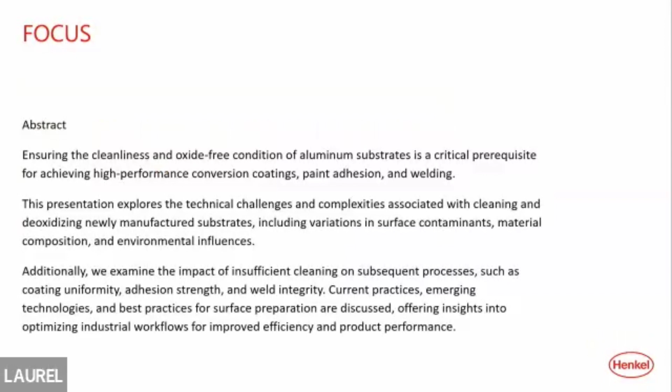This is my abstract. I wasn't sure how long I would be speaking today. This could be a dissertation. I will not cover all of this since I've got about 20 minutes, but this was what I was interested in when we were originally investigating it. And this is kind of what I'm getting into right now. I'll jump forward because you're going to get these slides in about a week anyways.

I am working a lot with aluminum castings and new aluminum alloys. And what I am seeing from my customers is that, of course, we're seeing a tremendous amount of use of aluminum in the industry. Lightweighting, we've heard of it. Sure, there was a big push with it for EV. Of course, that's kind of taking a little bit of a backseat, but hybrid is getting more of a push, which still has batteries in it.

Still ICE, we want to get as much mileage out of our vehicles as possible, which lends towards using aluminum. So we can displace some of that weight, get better mileage. And also, regardless, we all have sustainability goals, and aluminum is practically 100% recyclable. So it works well for everyone. Anytime we add alloys, it's going to make surface treatment a little bit more challenging for my side.

I'm working with OEMs and aluminum manufacturers, and they are sending me aluminum samples to work with. These are typically under NDAs. I don't necessarily know what I'm working with, and they're still expecting to get certain performance. Great. I love playing around with it, seeing what I can do in the lab. And it's interesting to see how these perform, how they take on a coating.

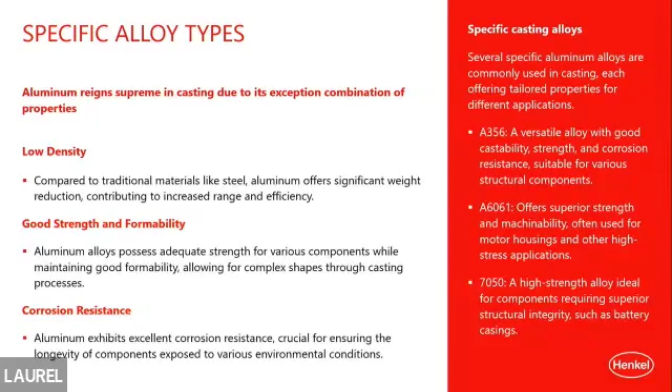Granted, this is a huge upfront cost, but this is going to move our manufacturing speed forward. It's going to reduce complexity, man hours. Granted, we saw orders of these gigacastings that were coming in, that were being installed throughout North America. I haven't been following it for the last few weeks, but my understanding is they're still being installed, they're still coming in, and they are causing a particular challenge for me.

With these gigacastings, they tend to be stickier metals. And these stickier metals can be more challenging to remove from the mold, so you need to use a stronger mold release agent to get it out of the mold. So now I have to remove that mold release agent. And I don't necessarily know what that mold release agent is. And I don't necessarily know what that alloy is anymore. So what I'm finding is I really need a good etch and cleaner.

Aluminum is amphoteric. So it'll dissolve at higher pHs and at lower pHs. So the nice thing about that is that I can get etch at higher pHs or at lower pHs. So at the beginning of our process, I'm finding I can't get away with a low pH cleaner. I need to etch those parts. But anybody that's played around with aluminum at all knows you can't smut it either. So we're running kind of a fine line there.

And thankfully we have labs, our customers send us parts and we run them and we dial it in and we figure out how well it's going to run and we kind of tune it up before we actually run it on their line. Now, of course, the alloy probably is going to change a little bit before we actually run it on their line. So then we show up on the line and we tune it up all over again. And that just keeps things interesting, right?

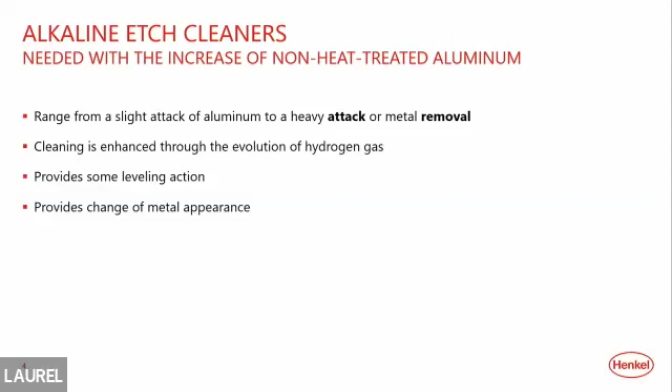So you've wasted time. It looks bad, and it could be a safety issue. So we have to remove that aluminum oxide layer. So we have to deoxidize it in some manner, either with an etch passivation, which is a process we have, or with an independent acid deoxidizer.

And look at my timing. Like I said, I do not want to get in the way of the bar. I'm being careful.

So acid deoxidizers work very well because they can also neutralize any residual alkalinity that's coming in from the system as well. They remove that oxide layer, and they can give you a nice uniform surface.

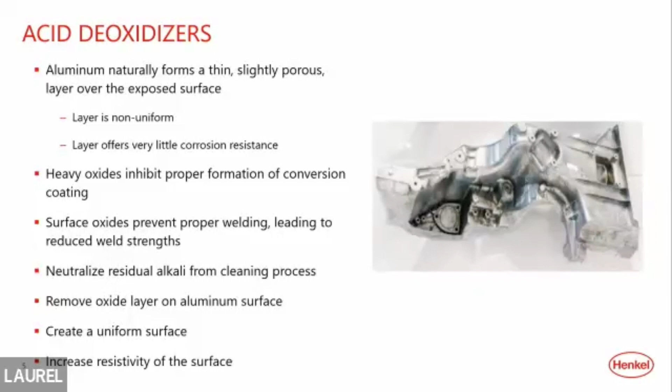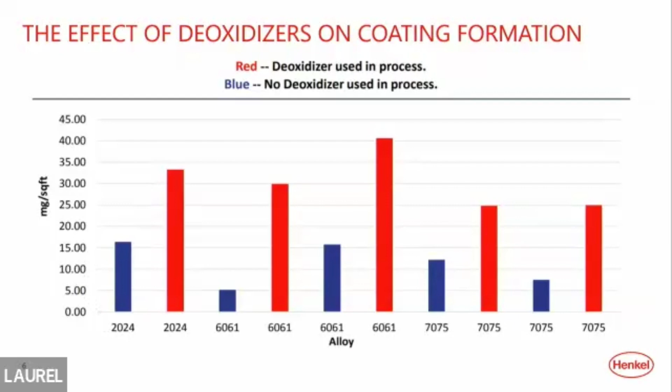So we only have a limited time in these systems. If your throughput is a problem, if you're ramping up production and you need to get more parts, more capacity through your systems, this becomes an issue if you're not hitting your coating weights. And you need to dial in your deoxidizer and make sure that you've removed that surface so that your conversion coating isn't doing the work of your deoxidizer. Because my conversion coatings, being I work with aluminum a lot, are acidic and will do a bit of etching.

But that's tight. And that's with a conversion coating, because as soon as you remove that aluminum oxide coating, aluminum wants to put that oxide layer right back on. So I need to seal up that coating immediately. I need to get it rinsed and get it passivated right away. Because if it hangs out, it's just going to put another aluminum oxide layer right back on. So no line stoppages.

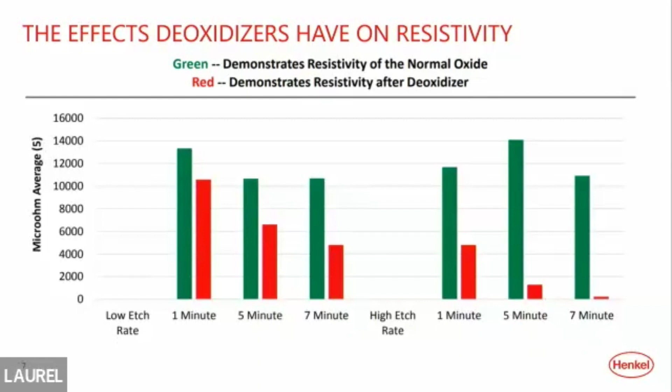And we use that DI water there because we don't want to drag any additional contaminants into our passivation stage, because honestly, that passivation stage is built up at maybe 1.5%, 2% chemistry. So you don't want to drag any contaminants into it. Just keep it as clean as possible. It'll last you as long as possible. And when I say DI rinse, just like David said, DI or RO water. And then we follow it up with a couple of good rinses and then force air dry it and send it on its way.

Now, what I've been working a lot with lately, the last couple of years, is the etch passivation process. This was developed out of Europe for a customer of ours that was having issues with battery trays. They had suppliers, and I work more on the component side. So they had component suppliers that were making battery trays for them. So they're manufacturing these battery trays in one place, and they have to move them to the assembly location.

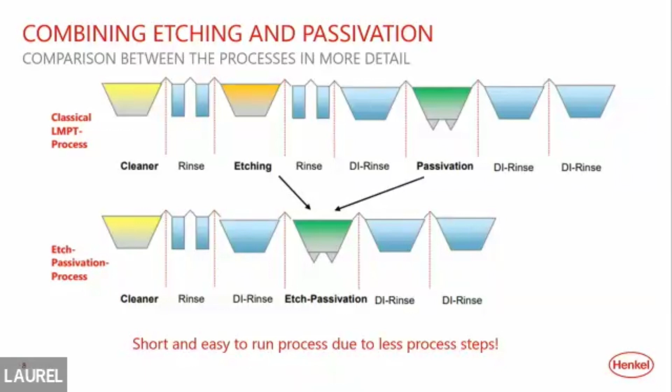But we were able to combine these and shorten up the footprint. And so now we have cleaner, rinse, DI rinse prior to this etch passivation stage, and then follow it with the DI rinses. And these are standalone products: the cleaner is a 1-part cleaner. The etch passivation is a 1-part product. There isn't a makeup and a replenisher. So it's pretty easy to control.

This is the product. Now, I know we don't want to really get into products, but it's titanium fluoride based. It is aluminum only. It is mainly for immersion, but it can also be done in a spray application. However, the coating weights will get higher in a spray application, so we've got to tweak it a little bit if you run it spray. It does run on the low pH side.

The temporary passivation coating is good for 4 to 12 weeks, depending on final storage conditions. You cannot store this right next to your tank. It needs to be clean, dry, covered, and low humidity. We do have one supplier that has it really dialed in, and they can store it for 6 months. But I do not tell people that they can do it for 6 months, because they even have specialized packaging that they put everything in and then they store it.

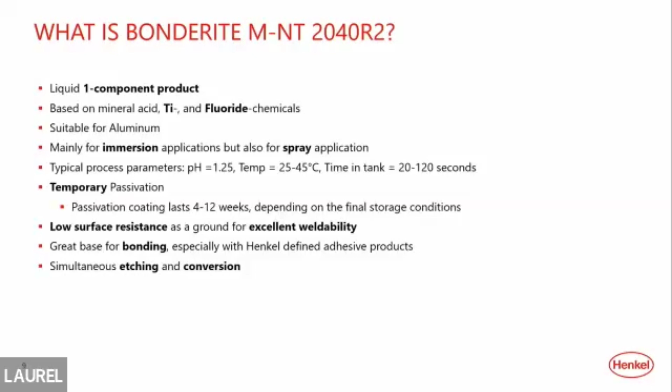But you can definitely process your part, package it up, and then put it on your truck and get it to the final operating spot where they can do their welding and adhesive, put in their gaskets, and paint it up. It's a great base for bonding and simultaneous etching and conversion.

Now, we were talking about it, I actually have a picture of the XRF gun. I got so excited when you said an XRF gun. It's amazing what people get excited about.

This is how you control it, because it is aluminum, and these coating weights are 1 to 15 milligrams per meter squared. You can't see this coating. It's just a little bit of something. And so we have to measure it with an XRF gun. And the XRF gun has to be calibrated with titanium standards that we recommend. You get the titanium standards from Micromatter in British Columbia, and you calibrate it every day, or else your customer won't be very happy with you, because the OEM suppliers that we do this for are pretty specific that you document that you are getting this dialed in coating weight.

Because if you get too high of a coating weight, they are concerned about welding interruption. And that is one of the reasons why they want the lower coating weights. Now, this product does not have the additional polymers in it that can interrupt your welding. We do have other products that, if you need more corrosion protection, you can add zirconium and polymers and build up your coating weights. But this is primarily a transportation coating, just to get you from point A to point B.

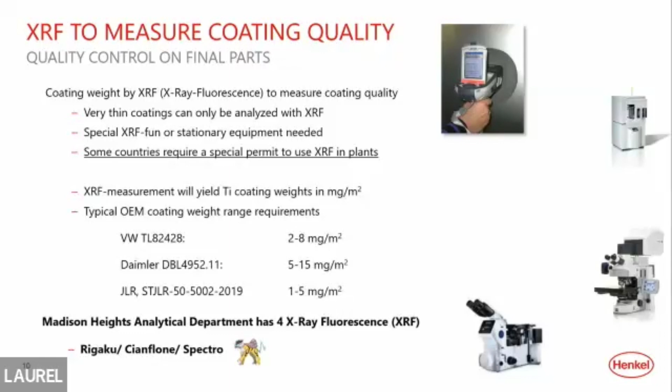And at Henkel, we have all kinds of toys, all the different XRF guns and XRF units to check it out. I do not travel with an XRF gun because people don't like it when you cross state lines with them. But I did get titanium standards. So my customers that have XRF guns, I can go there and check their equipment and make sure that their equipment is calibrated correctly.

So summary and key takeaways: we're seeing more aluminum parts coming into the market. The new alloys are more challenging. I no longer say, oh, just use this cleaner, just use this, just use that. We do cleaning studies. We double check. When we go in the field, we're ready, because we're ready to tweak it. And we know that there are going to be changes, because it's getting a little bit more challenging out there

with the new alloys. The etch passivation process works very nicely for aluminum components that are going to be glued, welded, or painted after treatment. It stabilizes the surface. As I said, the one thing, if I leave you with a good to know, is that that aluminum oxide coating, as soon as you remove it, will come right back if you do not stabilize that surface immediately. So this product, Bonderite MNT 2040 R2, is also used on aluminum wheel lines

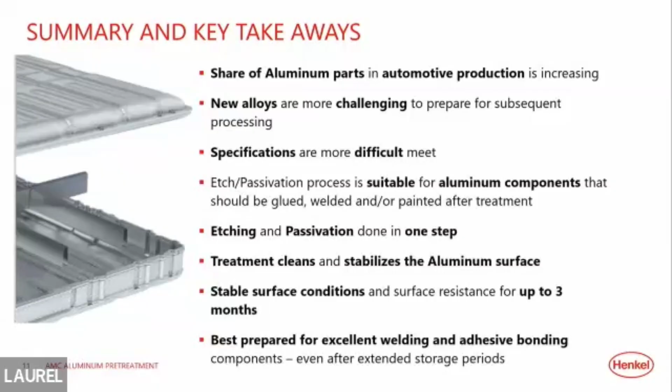particularly for people that have issues with line stoppages, because if you have a line stoppage in an aluminum wheel line, after you've deoxidized that wheel, you would want that protection, that little bit of titanium coating to protect that wheel before it hits the other conversion coating stage. So it's used in other applications to protect aluminum. But do you have any questions? Thank you.

Okay, thank you. Do we have any questions in the room? I have questions in the app, so I'll get started. And if anybody has any questions, they can raise their hands. So let me rephrase this. How detrimental is the etch material to the bath efficiency, and how do you most effectively remove the etch material from the bath? We use filters. Depending on it, we can use a 5 micron filter.

We do actually build up a certain amount of aluminum in the bath. It helps drive the reaction. But once you hit a certain threshold with the bath, like I said, it's built up at 1.5 to 2%. So how much are you fighting it, right? You might want to dump and recharge it. Or you might hit a steady state where you are carrying out as much and you're just rebuilding the bath. But we do build up. Aluminum is one of the things that we do monitor, and it helps drive the reaction. So did that make sense?

Aluminum castings, are they pure aluminum alloys or blends, especially for giga castings? They're blends, yeah. Pure aluminum has very low resistivity, which is great for an electronic application, but the strength is very low. So you need to alloy it to get some strength.